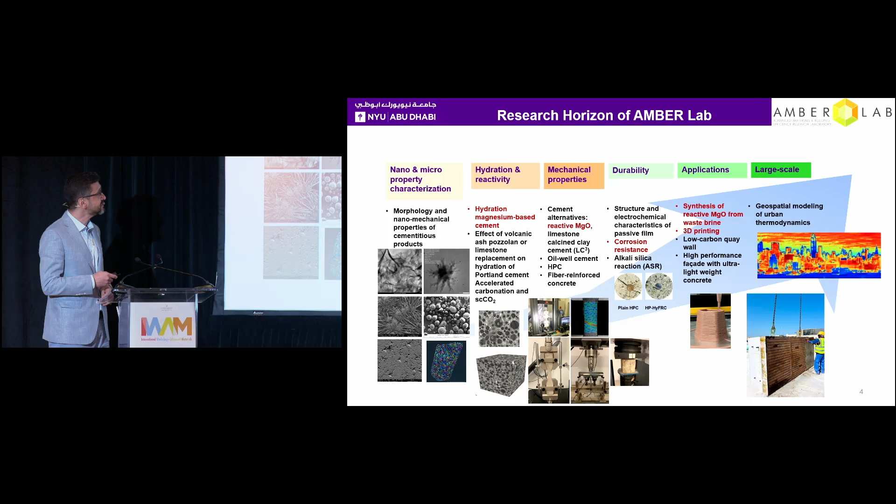Today, I'll be mostly talking about magnesium-based cement. It is an alternative to traditional Portland cement that absorbs CO2 during the strength gain mechanism. As we all know, by the middle of the 21st century the population will increase from 8 billion to 9.7 billion, and most of that population will be living in urban areas, particularly in coastal areas.

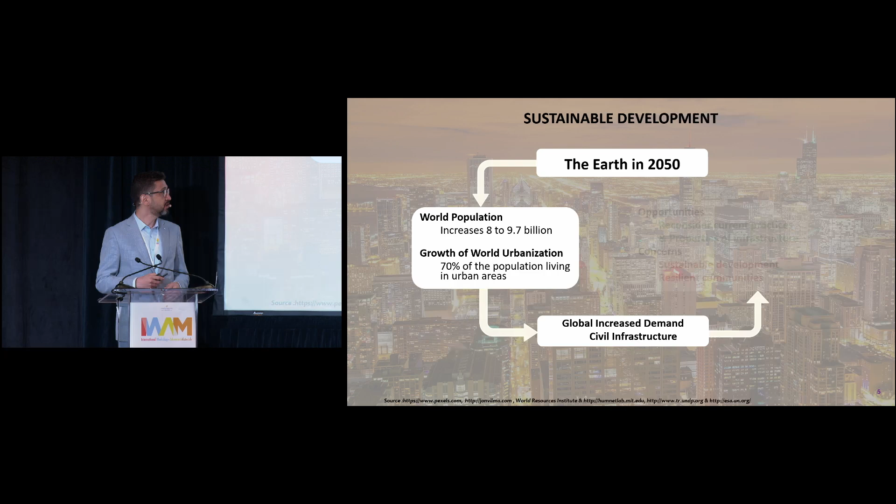Of course, it's good news as engineers, practitioners, developers, contractors, and architects - we are going to build lots of civil infrastructure. We can also translate this into an academic perspective: we will have a chance to educate the next generation of engineers and architects. From a research perspective, we will have a chance to do cutting-edge research to address sustainability and resiliency issues, reconsider our current practices as a whole community, and enhance the properties of our infrastructure.

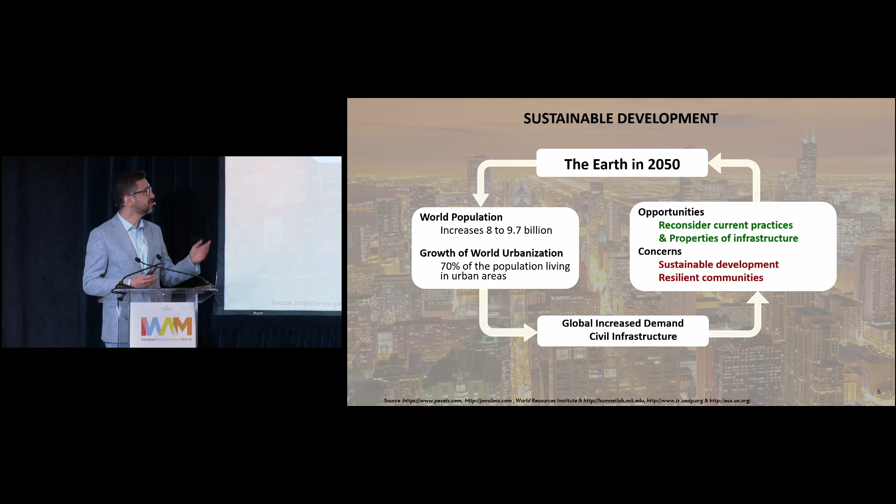It's also good to know that 40% of greenhouse gas emissions come from buildings. Both the UAE and United States have large room to improve in that area and increase energy efficiency to reduce global greenhouse gas emissions.

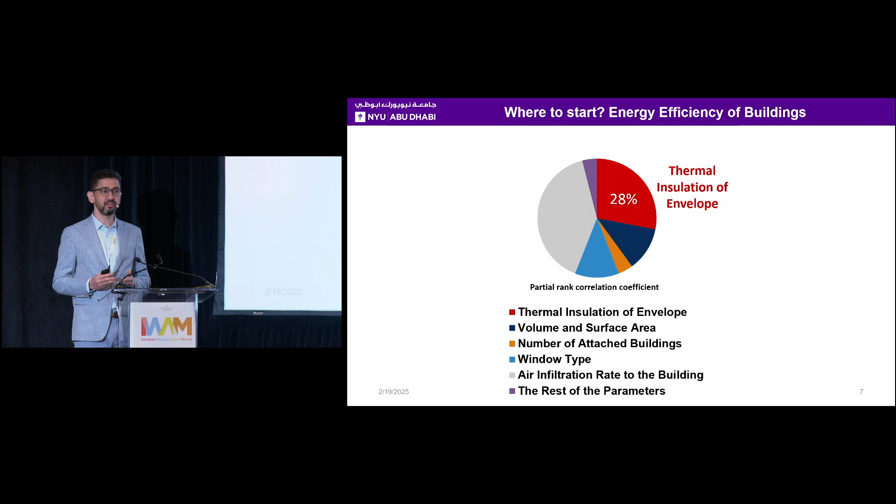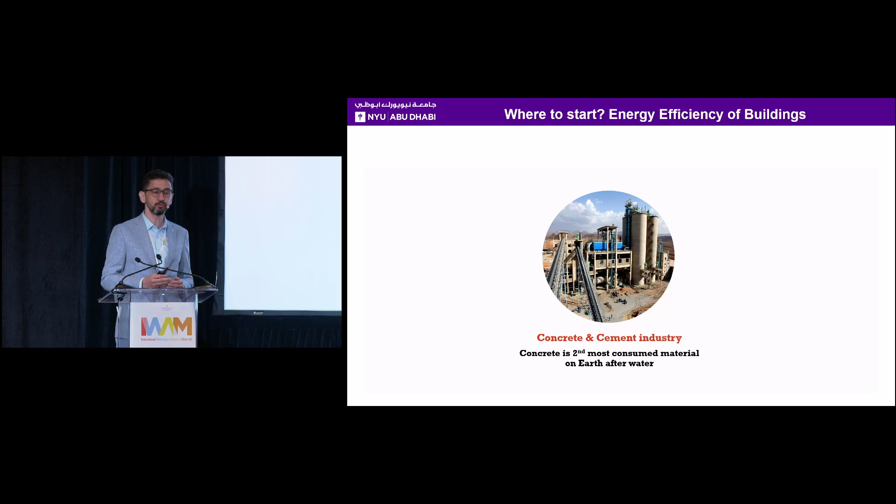Studies show that thermal insulation of buildings plays an important role in energy efficiency. To build our structures, we use different materials like steel, wood, ceramics, plastic, and of course concrete. Concrete is the most widely used human-made material after water, and it has a significant carbon footprint.

Projections show that demand for cement will increase significantly year over year, and our goal is to reduce the CO2 emissions associated with cement production.

On top of these challenges, arid regions like the Middle East and North Africa have water scarcity issues, and to narrow the gap between water supply and demand, desalination plants play an important role. Almost half of the world's desalination plants are located in the Middle East and North Africa regions.

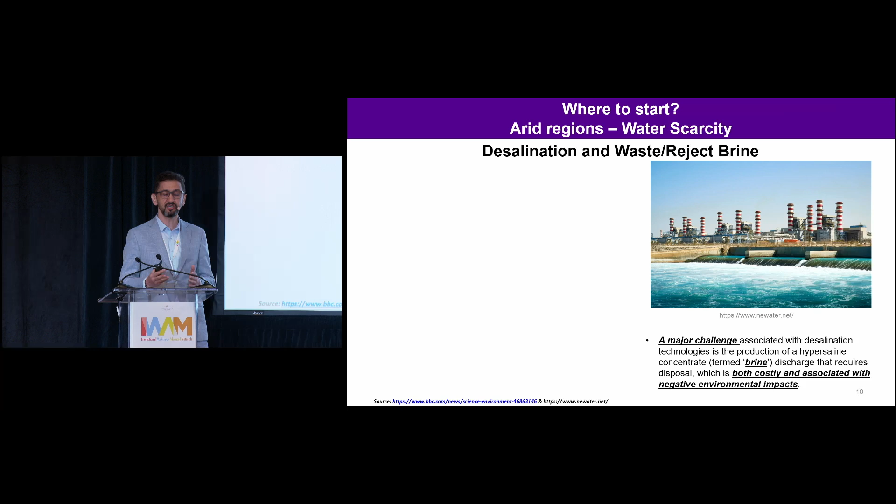Of course, desalination isn't without consequences. After water is desalinated, there is accumulated highly saline or hypersaline water, and the current practice is discharging this saline water back into the Gulf. The Gulf here is one of the hottest and saltiest bodies of water in the world, and discharging this salty water back is not an environmentally friendly approach - that's why we like to deal with these pressing issues.

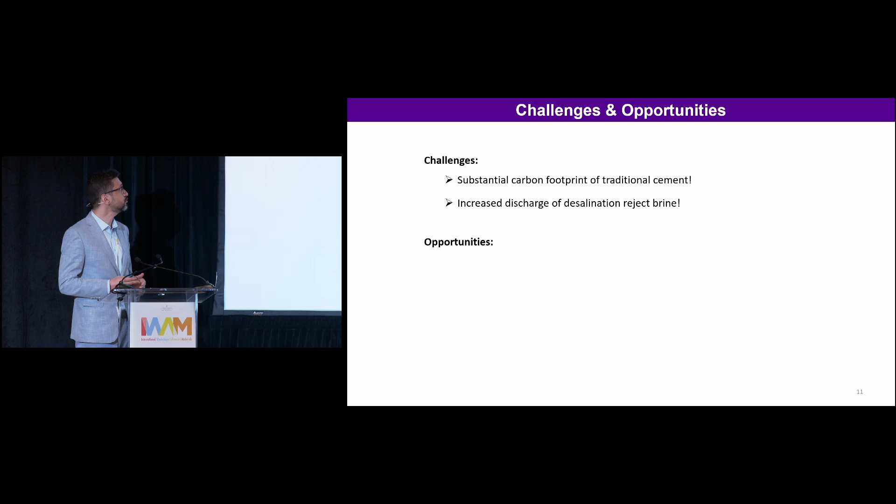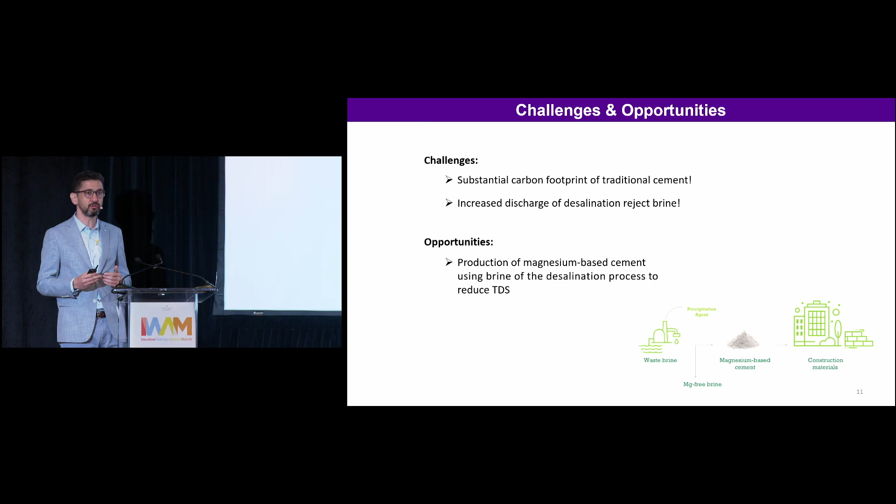The challenges we have are the substantial carbon footprint of the cement and construction industry, and increased discharge of desalination reject brine. The opportunity is using this brine to produce environmentally friendly cementitious material like magnesium-based cement. After processing, we can reduce the total dissolved solids in this hypersaline water and discharge it back to the sea safely.

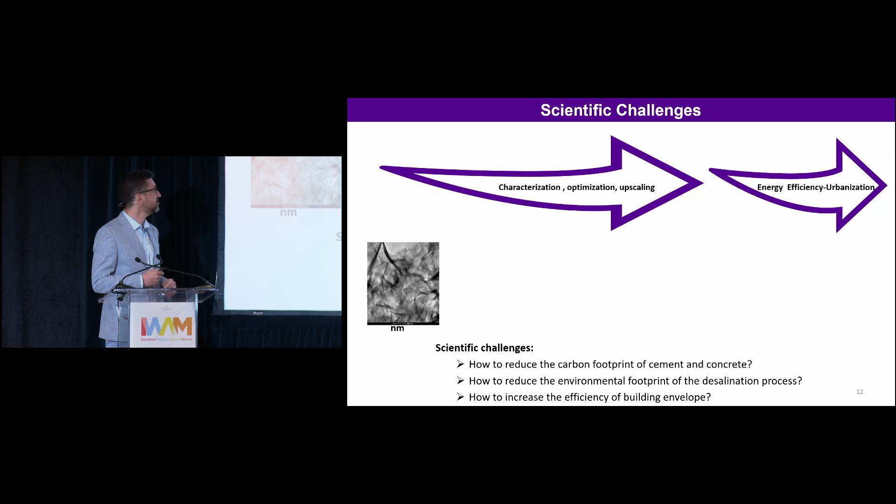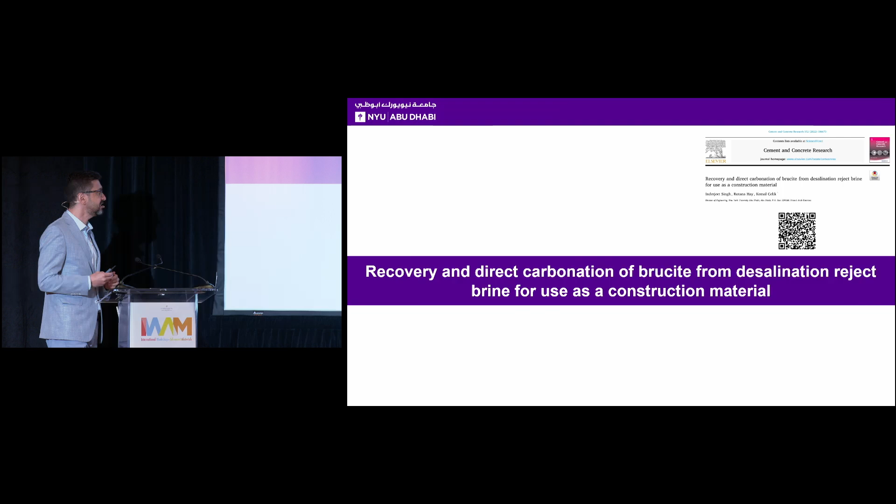Of course, it requires a multi-scale approach to address all these scientific challenges, starting from material characterization. Today I will be mostly talking about these four scales and give some snapshots of our projects. The first project I'd like to highlight is using reject brine from the desalination process and producing it as a construction material.

Magnesium-based cement is not new. It's produced from magnesium carbonate in a dry route, but at a relatively lower temperature for the calcination process, around 800 degrees Celsius, compared to 1400 degrees Celsius needed for calcination of Portland cement clinker. This decomposition of magnesium carbonate into magnesium oxide and CO2 is the one we don't want, because at the end we are producing and emitting CO2 into the atmosphere.

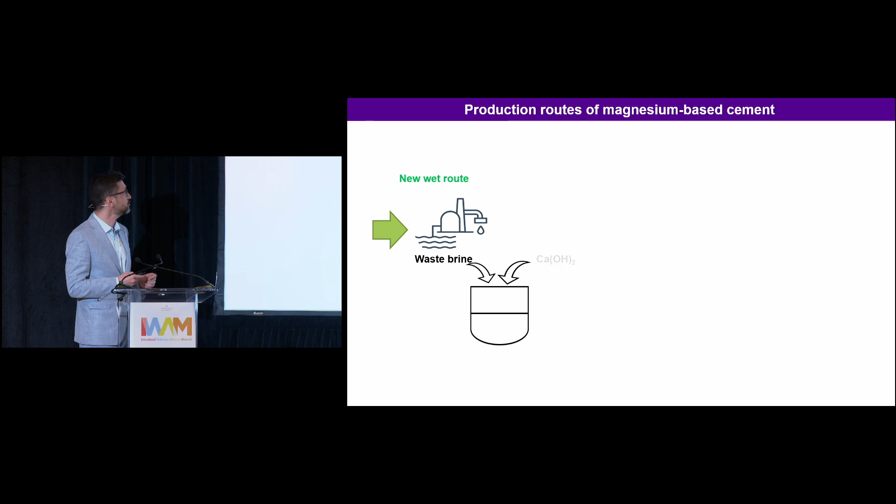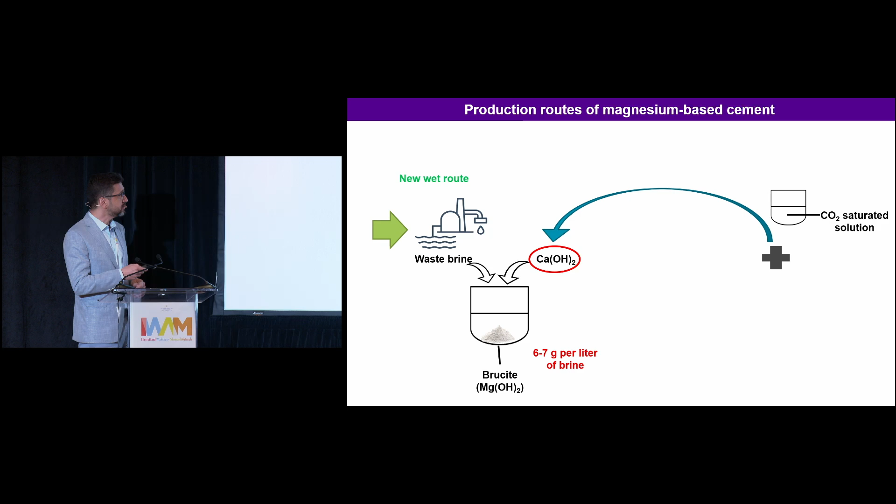So the new route that we are working on is using waste brine and a cost-efficient chemical agent to produce brucite, which is magnesium hydroxide. The source of alkaline that we are using can also be produced from this effluent of the reject brine or other sustainable sourcing, creating a closed loop and total recyclability.

I promise I don't want to show so many equations, but these are the important ones. Magnesium hydroxide is produced after desalination brine is treated, and then to gain strength, it needs to absorb CO2. The minerals produced after this carbonation process - nesquehonite, dypingite, hydromagnesite, and artinite - have different strengths and different surface areas.

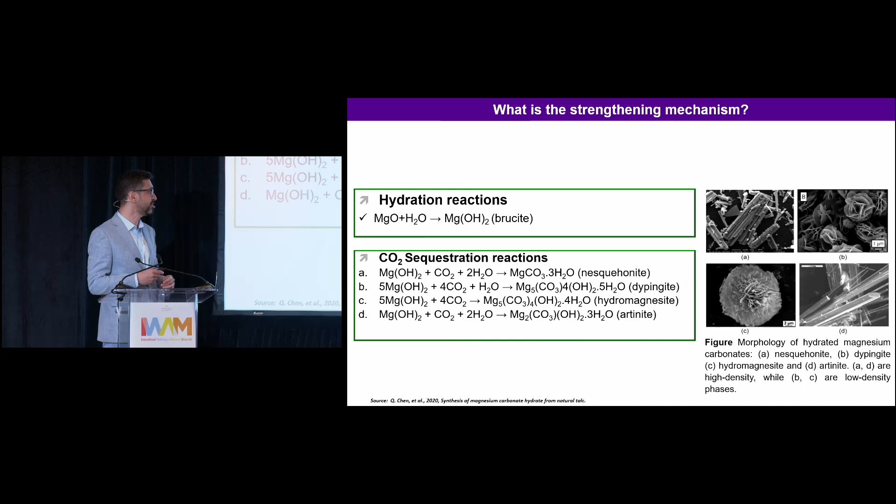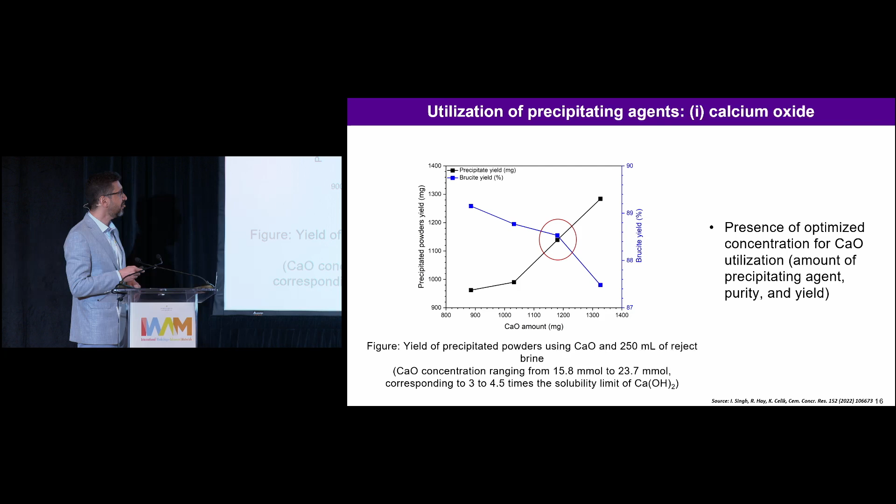Of course, to precipitate magnesium hydroxide requires some optimization process. We vary the calcium oxide amount and find the sweet spot with respect to precipitated powders versus brucite yield, and optimize our process. After this optimization, we did ICP-OES to measure the cations in the system, and the recovery is around 96% - 96% of the magnesium is recovered after this process.

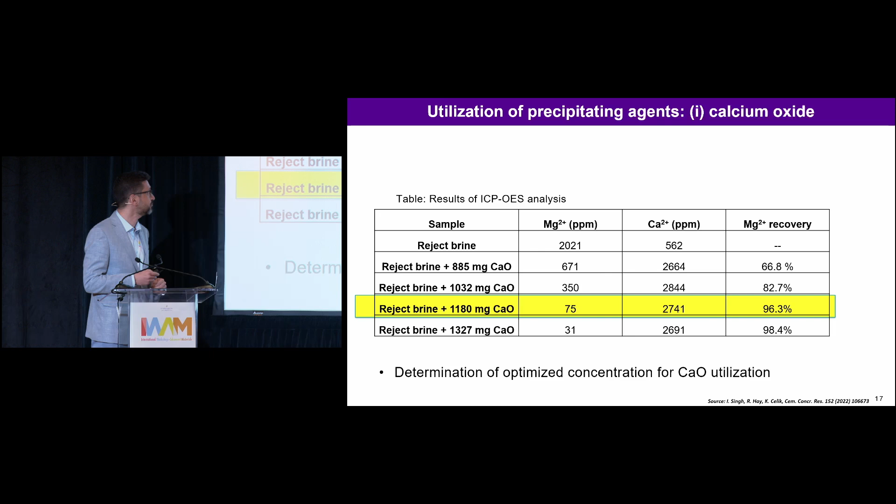We also utilized different alkalines like sodium hydroxide, ethanolamine, or ammonium hydroxide along with calcium oxide, though I didn't include those slides in my presentation. We also did a life cycle analysis, and most of the CO2 emissions or greenhouse gas emissions come from the production of this alkaline. Calcium oxide is the most environmentally friendly approach to process this reject brine.

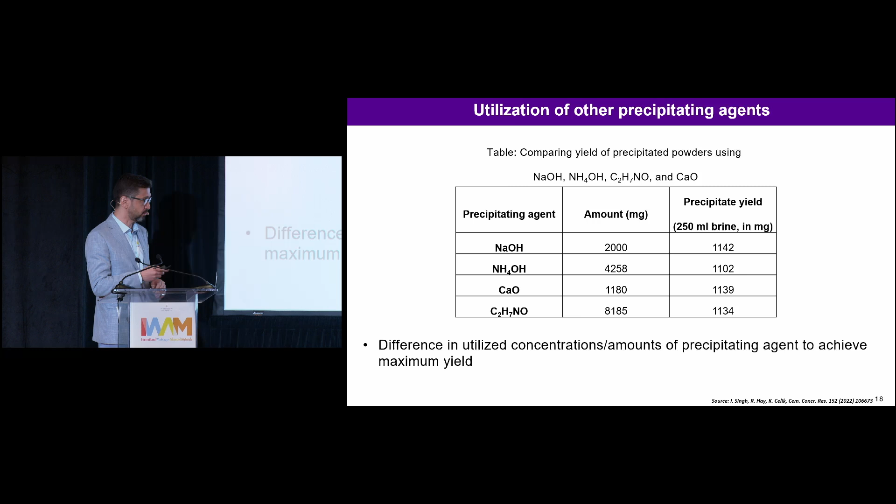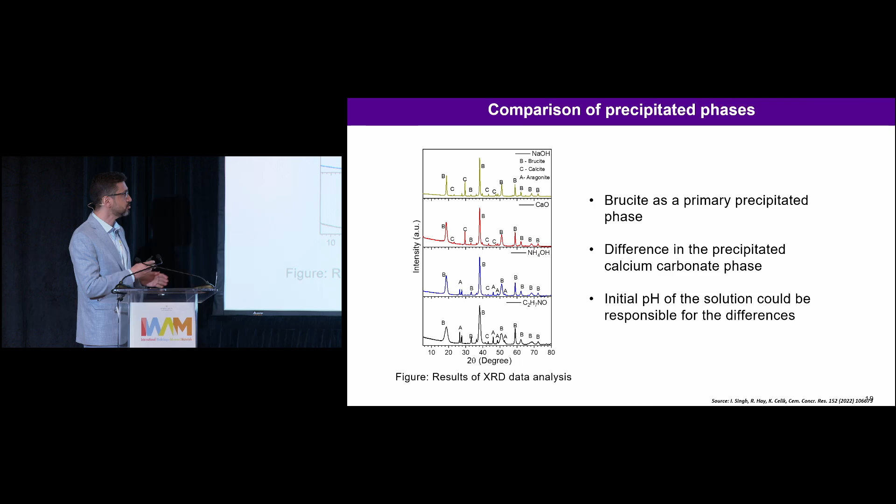The primary phase in this precipitated material with different alkalines, as mentioned, is brucite, with some trace amounts of calcite or aragonite. Most likely this is because of the initial pH of the solution used.

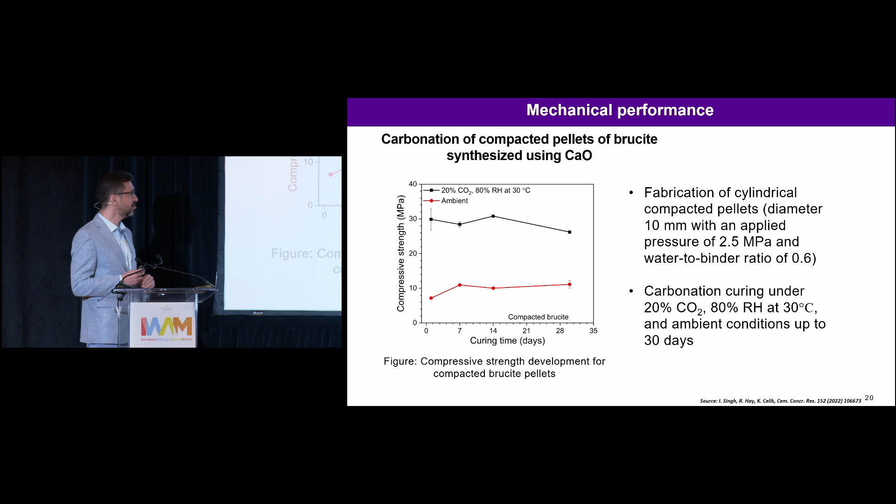Once we have this brucite, we need to cure it in an accelerated carbonation condition to increase the strength gain process. The sample cured in air reached around 10 megapascals, but once we accelerated the carbonation process with 20% CO2 and 80% relative humidity at 30 degrees Celsius, the strength development is significant - around threefold compared to ambient curing condition. 30 megapascals is sufficient for most structural or construction applications.

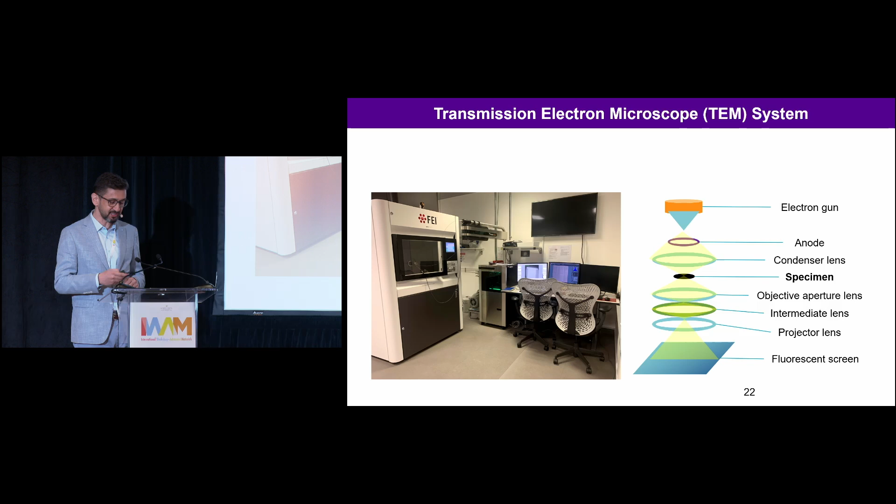In another project funded by NSF, we want to maneuver nucleation, growth, and phase transformation mechanisms with in situ visualization of the magnesium carbonate through nucleation mechanisms. This is an ongoing project, so these are preliminary slides I'm not going into too much detail on, but we use transmission electron microscopy, similar to light microscopy, but instead we use an electron gun, allowing us to look into the morphology, diffraction pattern, and chemistry via EDS maps.

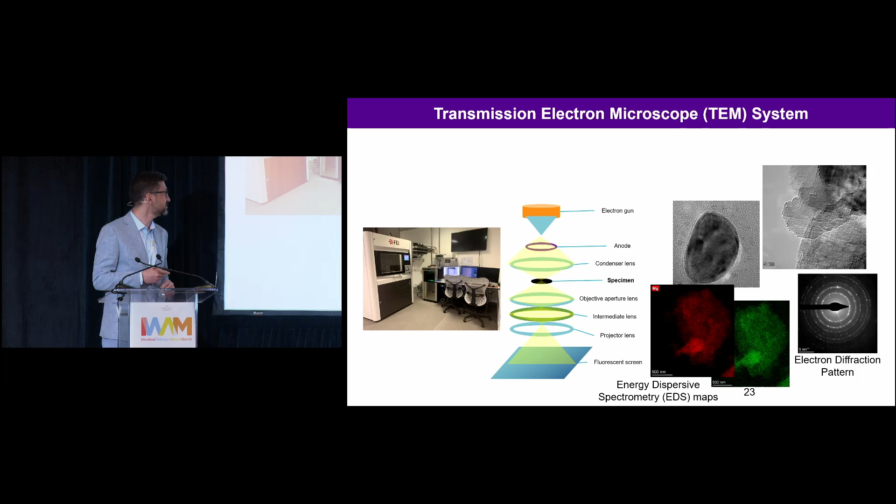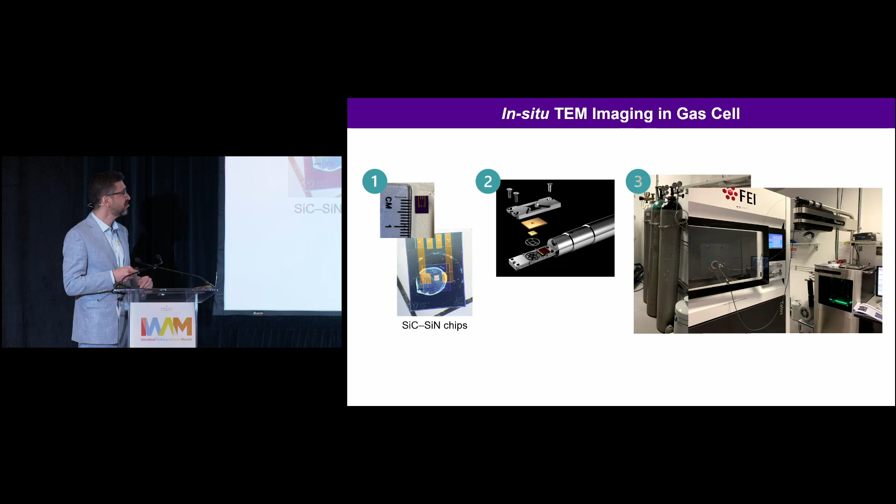The special instrument we use is an in situ carbonation chamber within this instrument. In this chamber, we are able to vary the pressure, flow rate, temperature, and gas mixtures, using a tiny sample holder assembled into the TEM machine. Using silicon carbide and silicon nitride chips, we add our samples and assemble them into the TEM to look into carbonation and hydration mechanisms in real time.

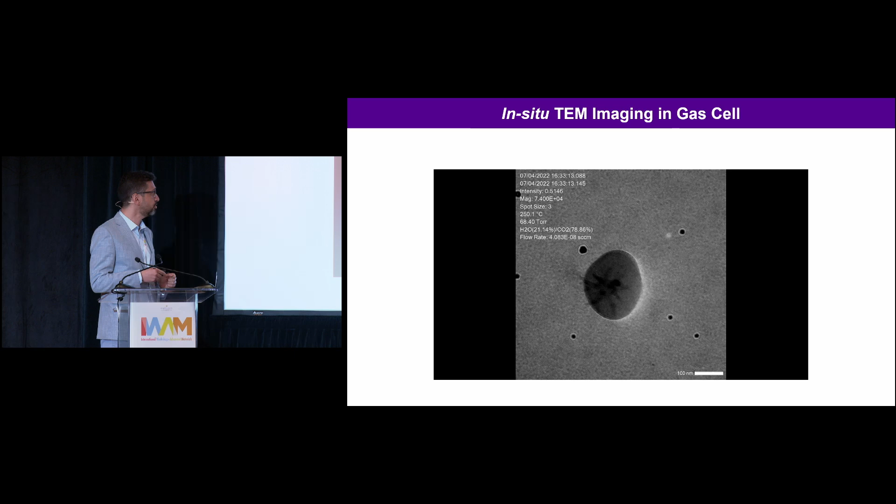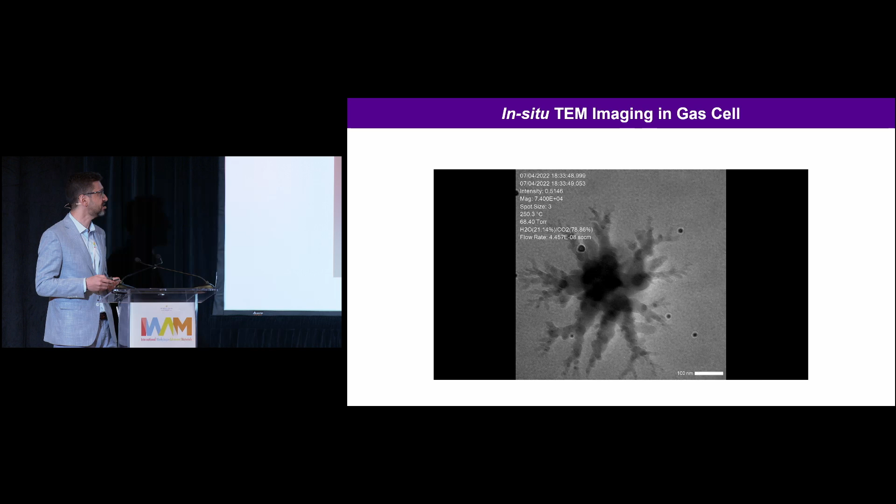So after around 20 minutes, we are able to see some round shape forming, and then after around 1 hour, there's an edge breaking out and the start of nucleation, followed by growth on these edges. After around 2 hours, we see small, nano-size particles forming in the microstructure. We suspect this is amorphous magnesium carbonate because there is no clear pattern in the diffraction pattern.

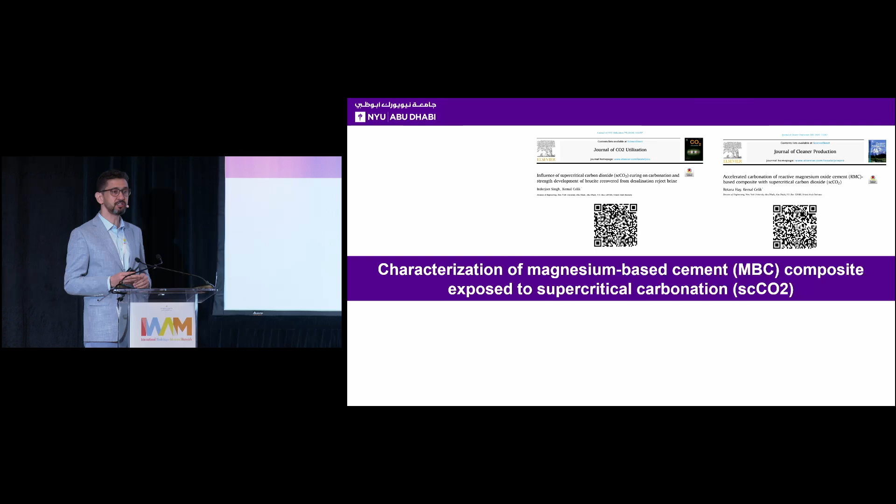Another project I want to highlight is using supercritical CO2 to accelerate the carbonation process. As you're likely familiar, supercritical CO2 has low viscosity and can penetrate deeper into the materials. What we need is to increase the temperature to around 31 degrees Celsius and the pressure to around 7.5 megapascal, then observe the phase transformation and CO2 sequestration capability in the matrix.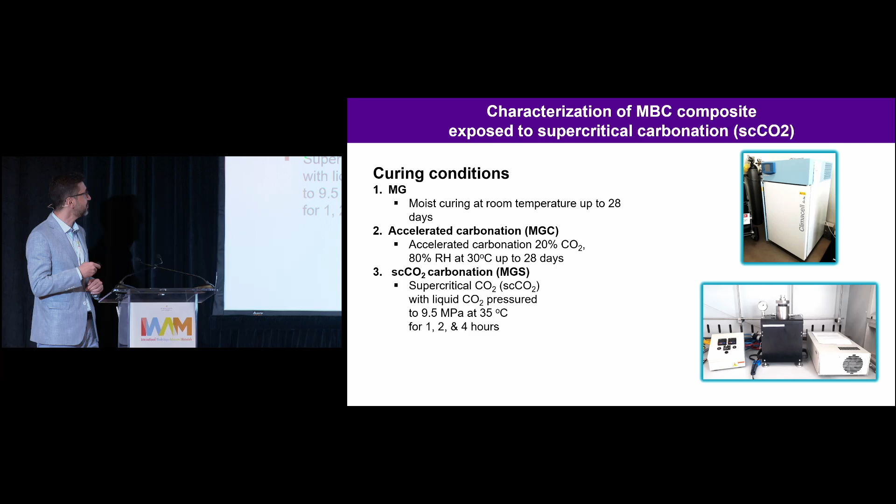We have 3 samples: one magnesium cement cured in air, another in an accelerated carbonation chamber, and the third using supercritical CO2. We compare the results through a comprehensive testing program. The most important one, Raman spectroscopy, shows the main phase is brucite, but we also see peaks for nesquehonite and hydromagnesite. At 28 days of curing in the accelerated carbonation condition, we see hydromagnesite, but with supercritical CO2, the hydromagnesite peak disappears and we mostly have the nesquehonite phase.

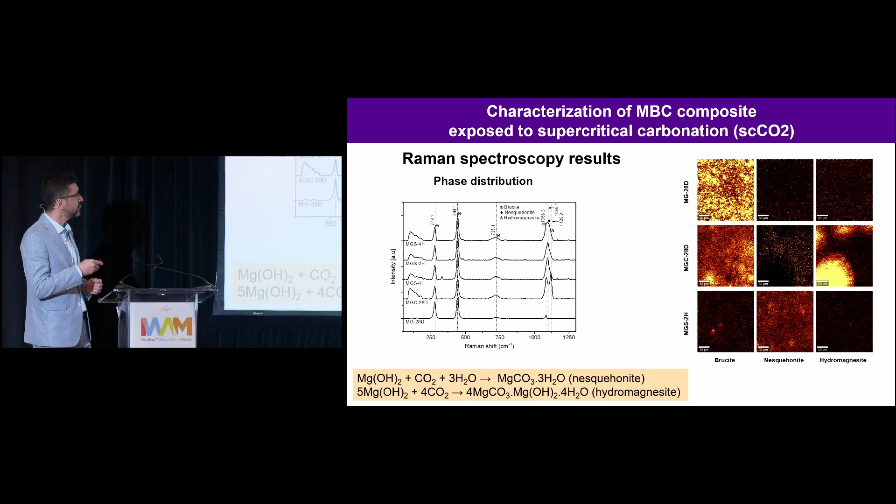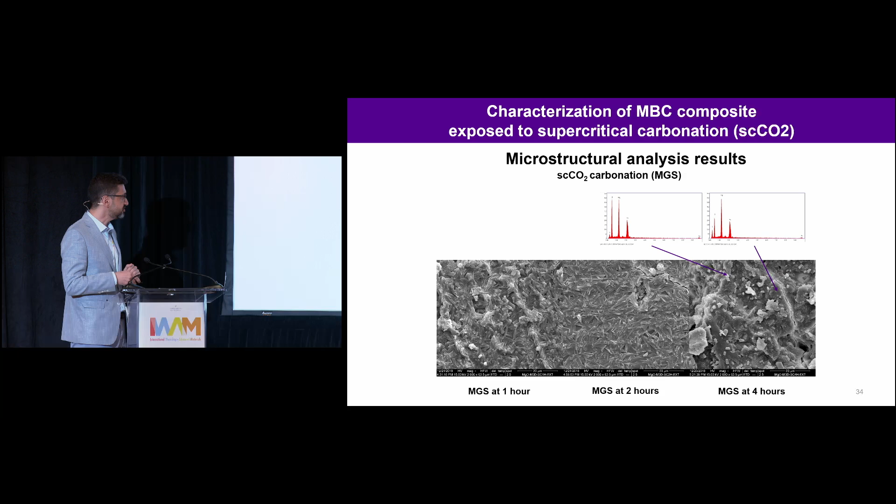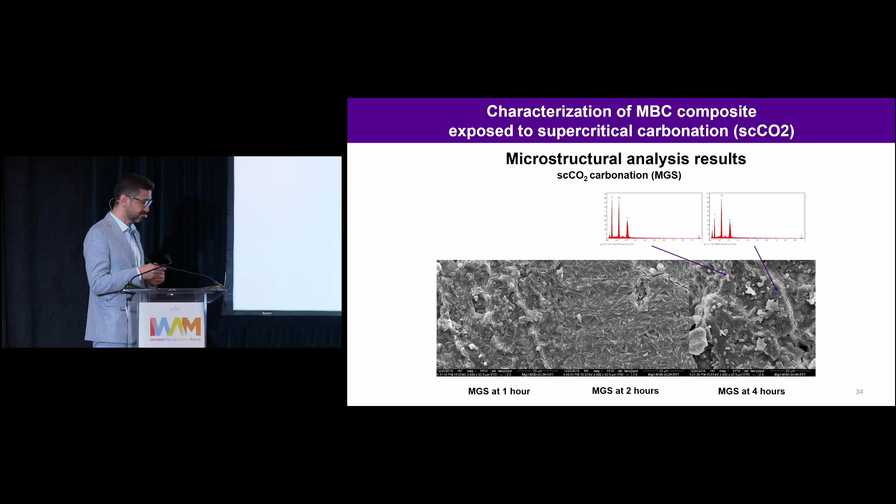So as an engineer, we have to look at how strong these materials are. After curing, as I mentioned previously, we have significant strength gain in the magnesium-based cement, but we need to wait around 3 to 7 days to gain this strength.

For the precast concrete industry, we need to accelerate the production cycle to within an hour, for example. In this case, the supercritical condition is much more useful. In 4 hours, for example, we reach around 40 megapascal, slightly above the strength of the accelerated carbonation condition, and the carbon sequestration factor is around 31 to 34%.

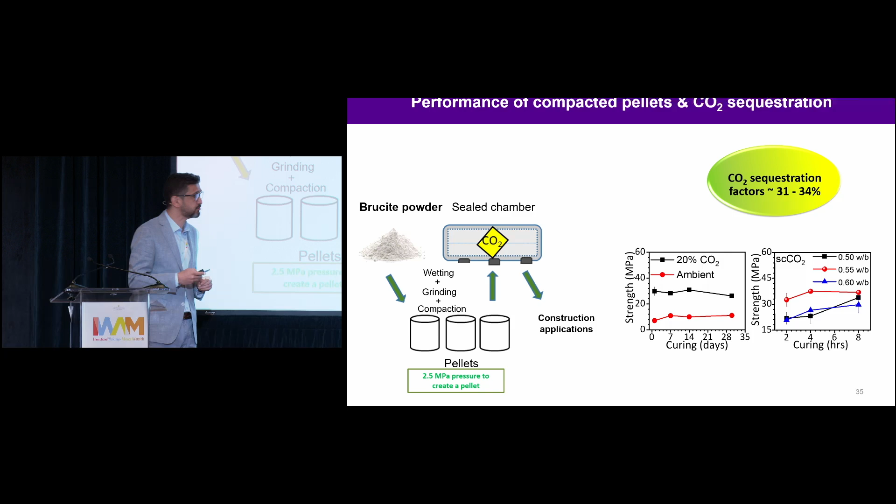Here we see another version of this mechanical strength development with respect to water-to-binder ratio. At 14 days, the sample cured in the environmental chamber reaches around 30 megapascal, while the one cured in the supercritical reactor reaches much higher strength.

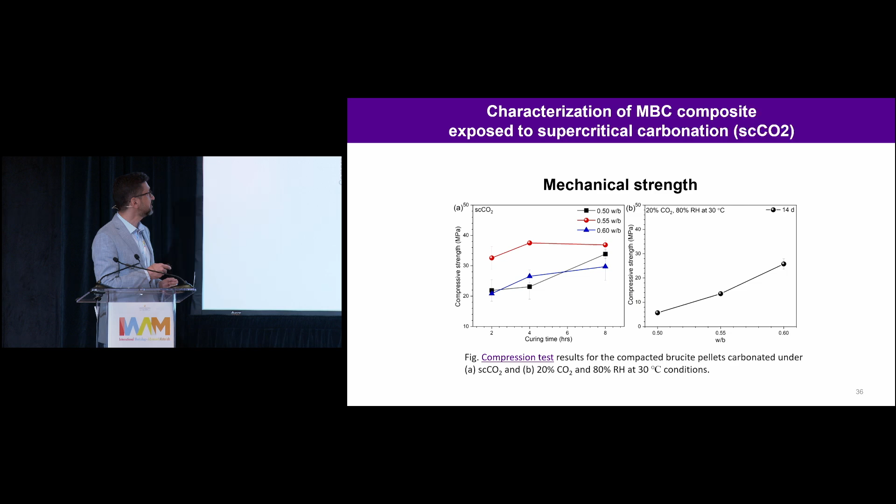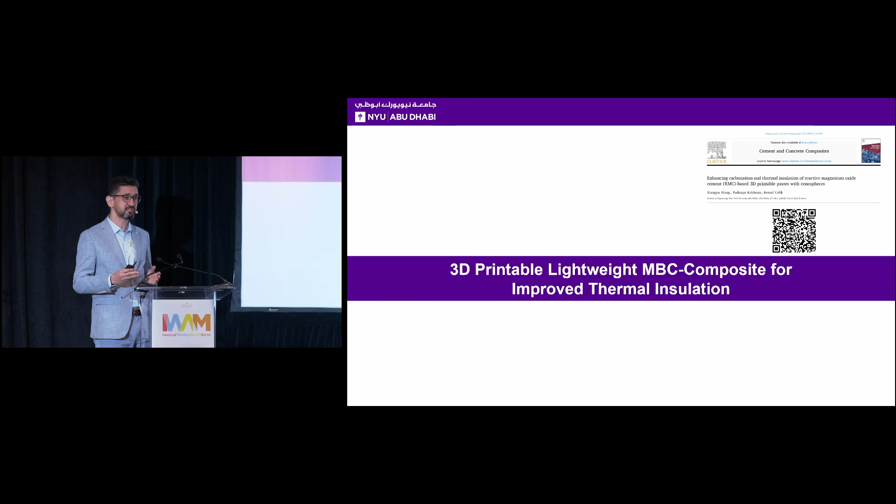In this region, 3D printing is also another hot topic, and we'd like to see how this material is 3D printable, and how adding cenosphere, a byproduct of coal combustion power plants, will be useful to improve the thermal insulation of the structure and produce a lightweight composite.

So we look at 3D printability of this magnesium-based cement, adding 20% cenosphere and some PCE-based chemical admixtures. We are able to 3D print this material with intriguing shapes, and we also compare the printed versus cast sample, curing in the accelerated carbonation condition.

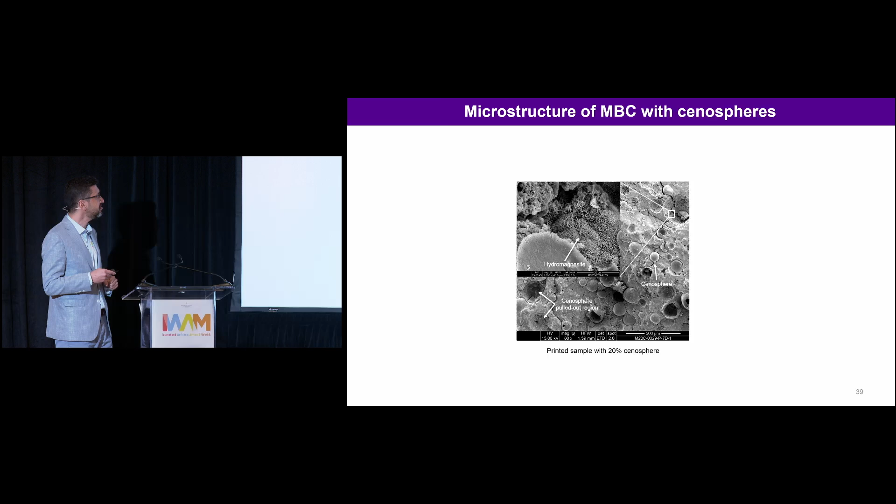As I mentioned, cenosphere is a byproduct of the coal combustion power plant. These are hollow, inert materials, and here we see some of them, with some pulled out after testing. We are also able to see hydromagnesite minerals in the microstructure.

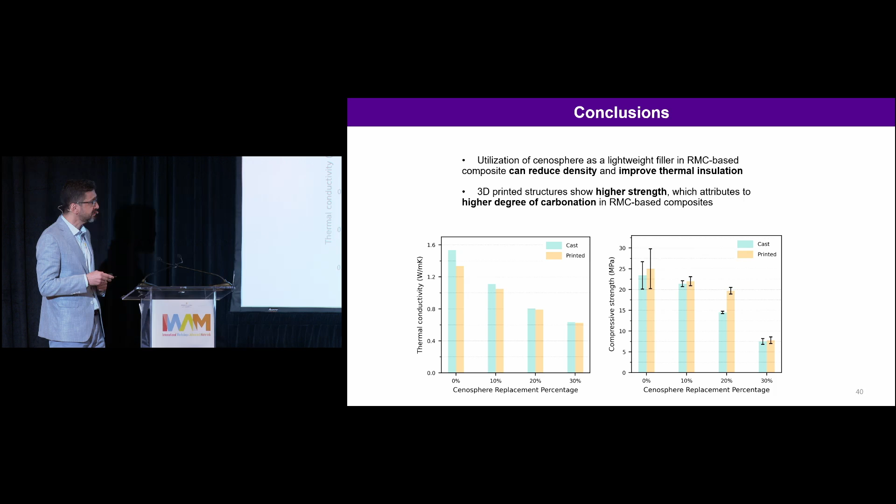We also look at the thermal conductivity. As expected, thermal conductivity decreases by increasing the cenosphere, this porous material, and we compare the result with cast and printed versions. Since 3D printing also increases the porosity in the structure, the 3D printed structure has lower thermal conductivity. In terms of strength development, the 3D printed structure has larger strength. If you look at this 20% cenosphere replacement, it is because of the carbonation process.

3D printing provides larger surface area and more porous structure, which increases carbonation during this process. We can safely say that 3D printing and carbonation will be a good option in magnesium-based cement.

In a continuation of this NSF project, we'd like to see if we can reinforce this engineered magnesium-based cement with synthetic fibers.

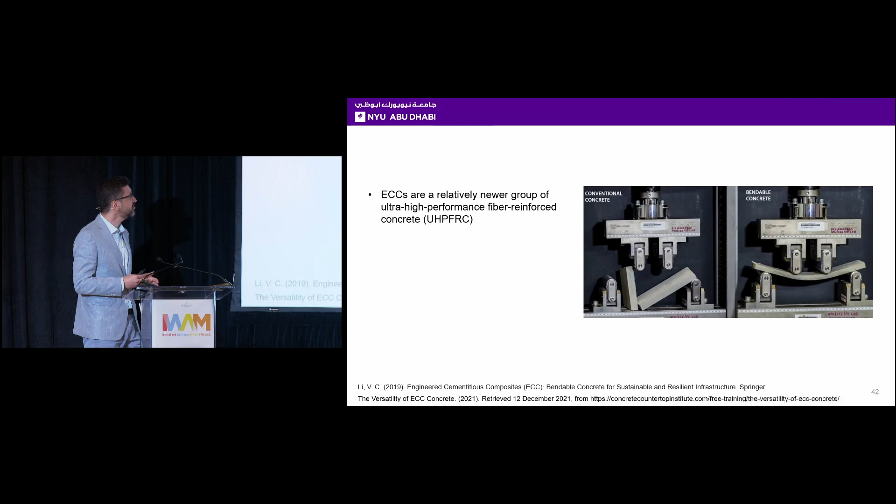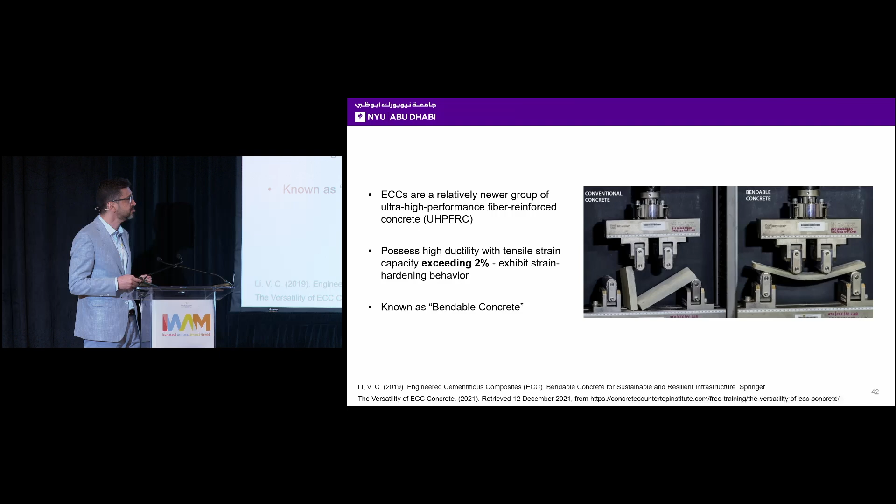ECC, or engineered cementitious composites, are a relatively newer group of ultra high performance concrete. As you know, concrete is a brittle material in tension and flexural loading - it can break easily. But ECC is also called bendable concrete. Through fibers, we can increase the strain capacity.

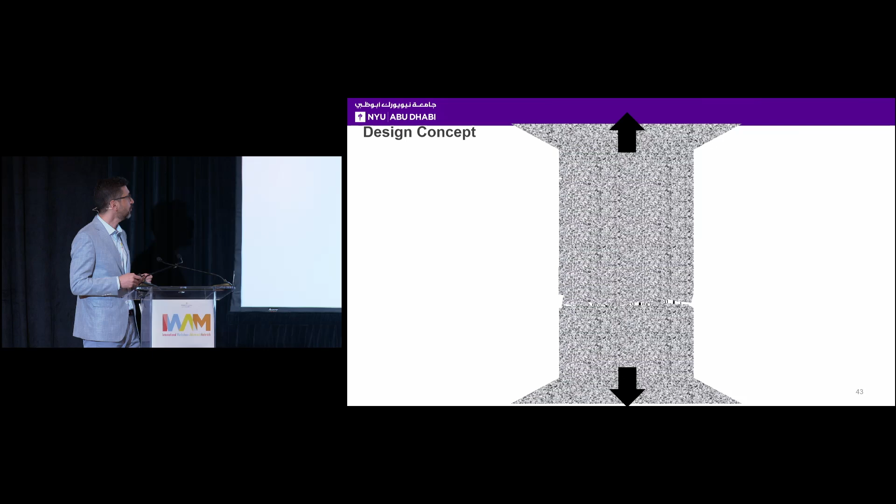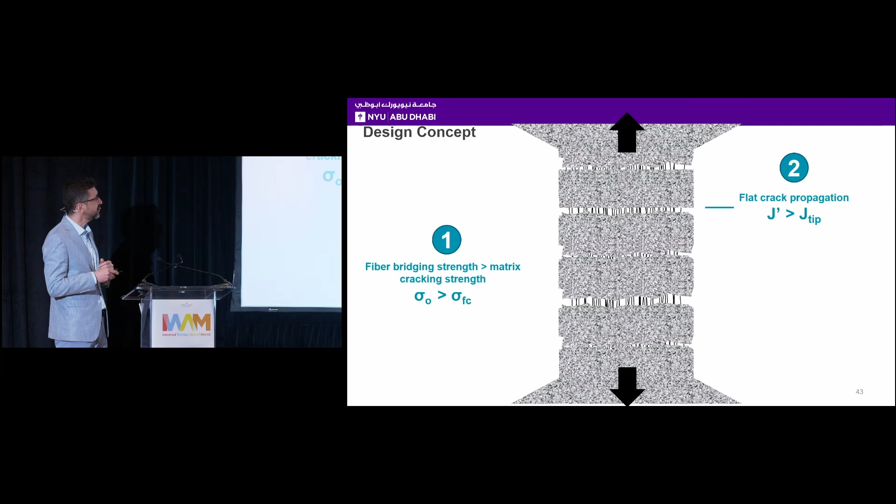The goal is to increase the strength of this bridging matrix and get higher fiber bridging strength than the matrix strength by itself, then dissipate or absorb this energy through laminar or flat cracks. Energy dissipation needs to appear in order to have this bendable concrete.

There is a tedious micromechanical modeling process that I'm not going to get into too much detail on, but our goal is to increase the energy dissipation through fiber addition, and then increase the bendability or strain capacity of the concrete.

The parameters that we can tailor are the fibers themselves, the fiber matrix interface, and the matrix. There are different parameters within these three main categories. We can test this fiber matrix interface with a single fiber in our facility, and also get the bulk material properties through flexural test and tension test.

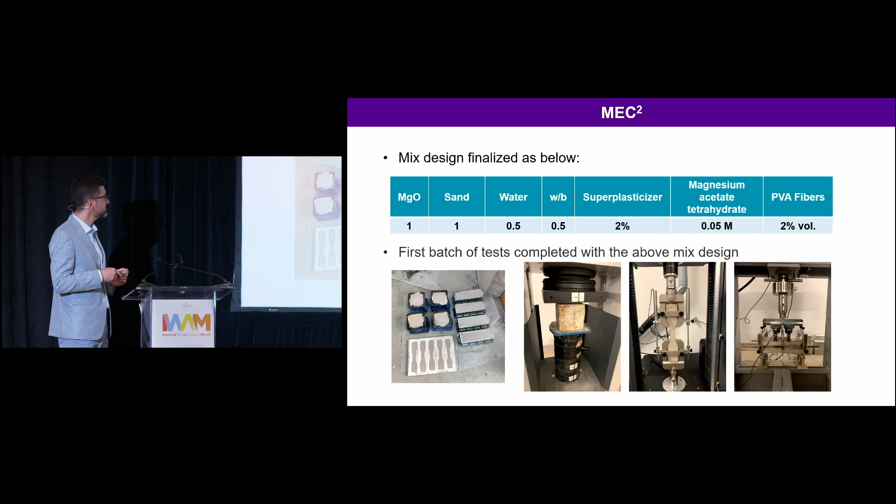By tailoring this mix design, we are able to produce some MEC², or magnesium-based engineered cementitious composite, and produce some cube samples, prisms, and dog bone samples. We test them in tension tests and do some digital image correlation to see how these materials behave under loading.

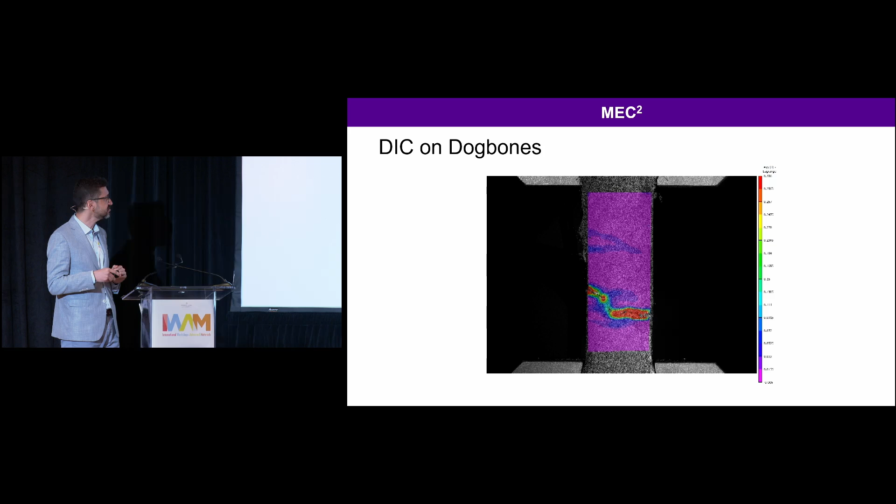Again, this is an ongoing work, I'm just giving you a heads up. We are able to see energy dissipation through cracks, but our goal is to increase these cracks throughout the matrix. This is the test we have done for the 4-point bending test.

Once it is loaded, we can see the cracks, as well as stress and strain development. What we'd like to see is the red color changes distributed towards the bulk faces.

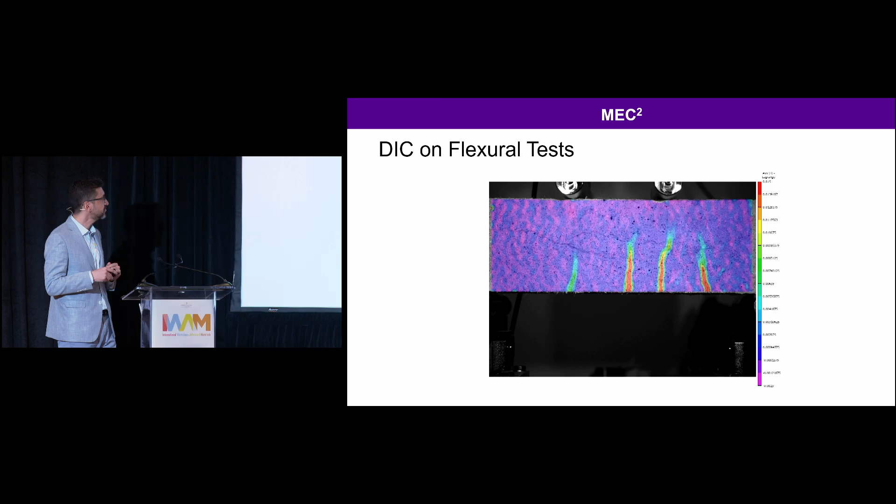To wrap up my talk, I'd like to show you a short video that brings what we have discussed to life.

We are attending a competition, a UAE-based competition. Actually, it's an international competition, but organized by the Environmental Agency of Abu Dhabi. Currently we are in the last phase of this competition. We have been dealing with 4,000 liters of brine per day at this stage. But this video was prepared for the previous stage, just showing 300 liters of brine. I hope it will work.

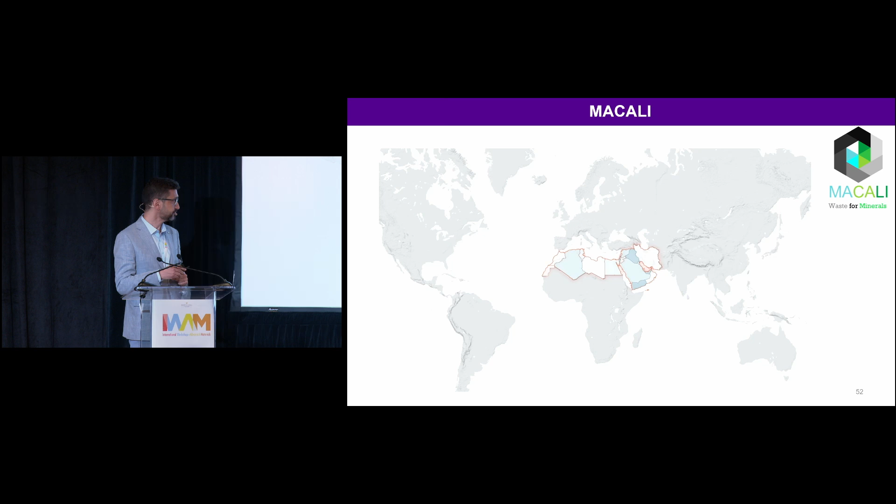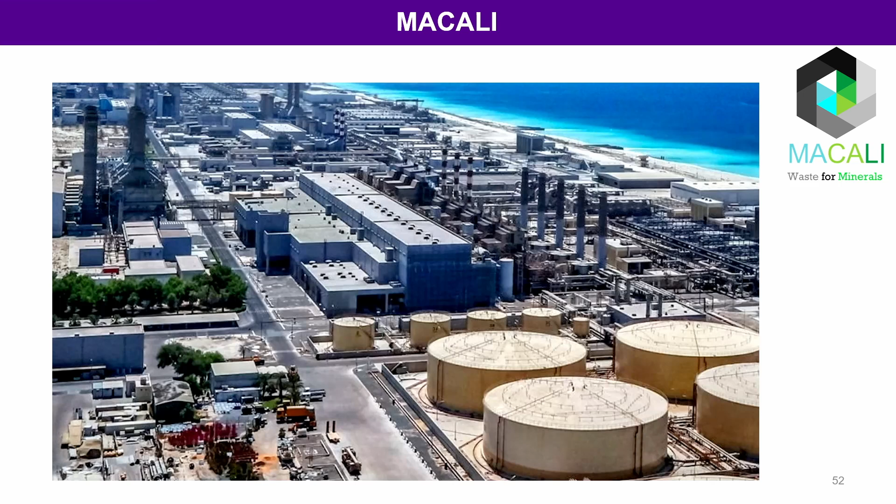The Middle East and North Africa region accounts for 70.3% of global brine produced from the desalination process. Direct disposal of this brine to the sea has adverse effects on marine life. Meanwhile, several industries, including the construction industry, are evolving to employ low carbon footprint materials and contribute to net zero carbon dioxide goals. With these motivations, Amber Lab at NYU Abu Dhabi came up with MACALI, a 3-stage process to recover magnesium hydroxide, calcium oxalate, and lithium carbonate from reject brine for construction and energy applications.

This technology combines 3 stages involving chemical precipitation for the recovery of these minerals.

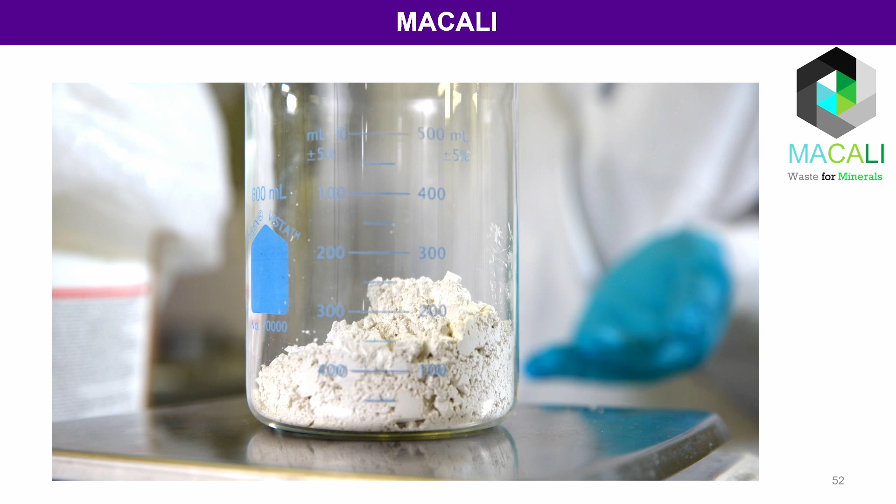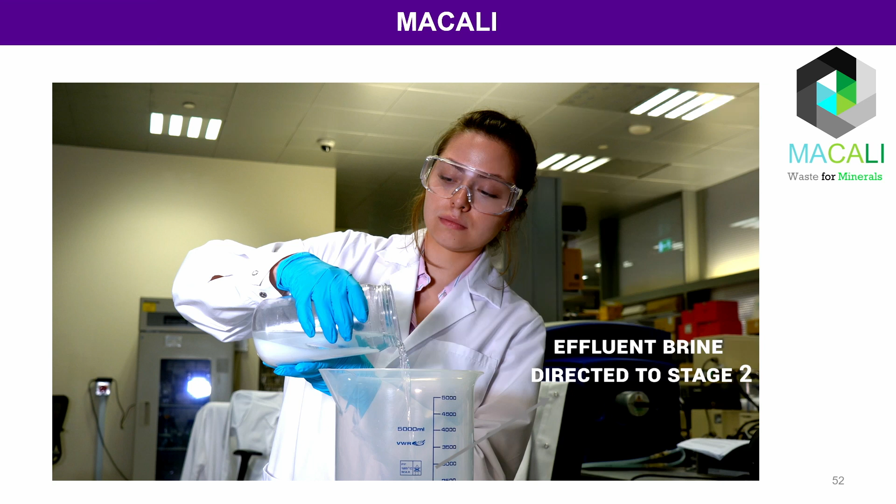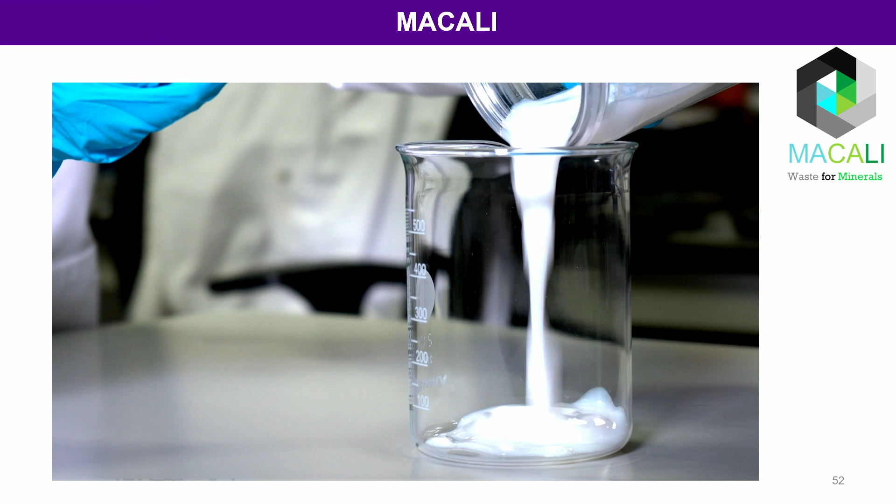In stage 1, we employ a simple precipitation process to synthesize brucite from reject brine. In the synthetic procedure, calcium oxide, a cost-efficient precipitation agent, is mixed with deionized water, which is then added to 15 liters of brine. The solution is stirred for 1 hour. The milky solution is then centrifuged to separate the powders and calcium-rich brine, directed to stage 2. Depending on the purity required for brucite, the wet powders can be washed in one or several centrifugation cycles using deionized water to achieve up to 94% purity. The wet powders are then transferred to heat in an oven at 100 degrees Celsius to obtain anhydrous brucite.

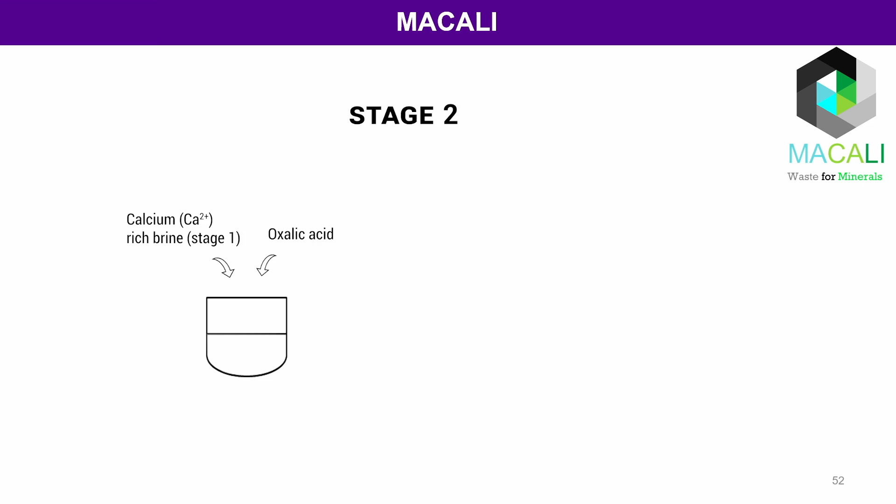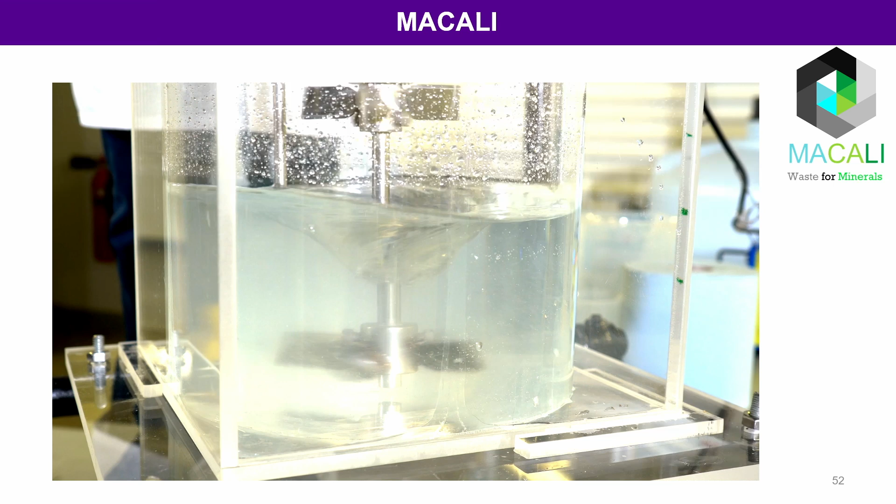In stage 2, a similar precipitation process can also be utilized to recover calcium ions in the form of calcium oxalate, a valuable mineral, using oxalic acid as a cost-efficient precipitation agent. This process is similar to stage 1, where oxalic acid could be added directly to calcium-rich brine from stage 1 to synthesize calcium oxalate powders within 1 hour of reaction time.

In stage 3, lithium carbonate could be recovered by a combination of evaporation and precipitation procedures from the effluent brine of stage 2.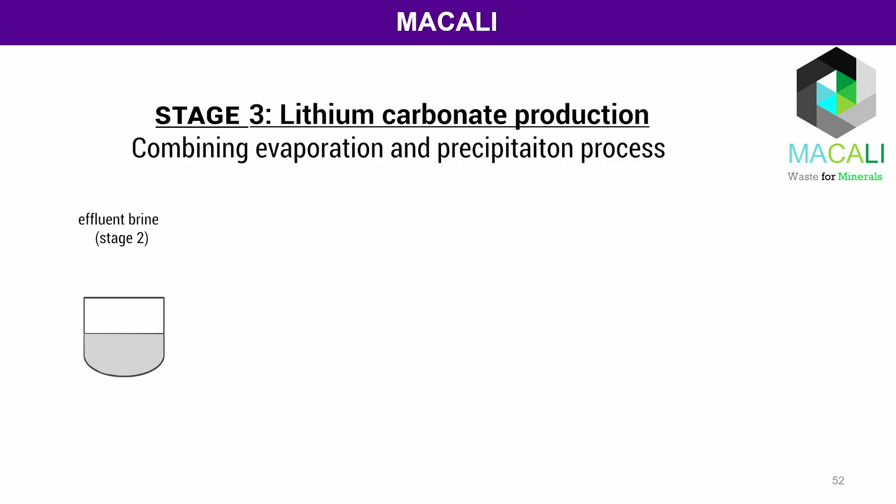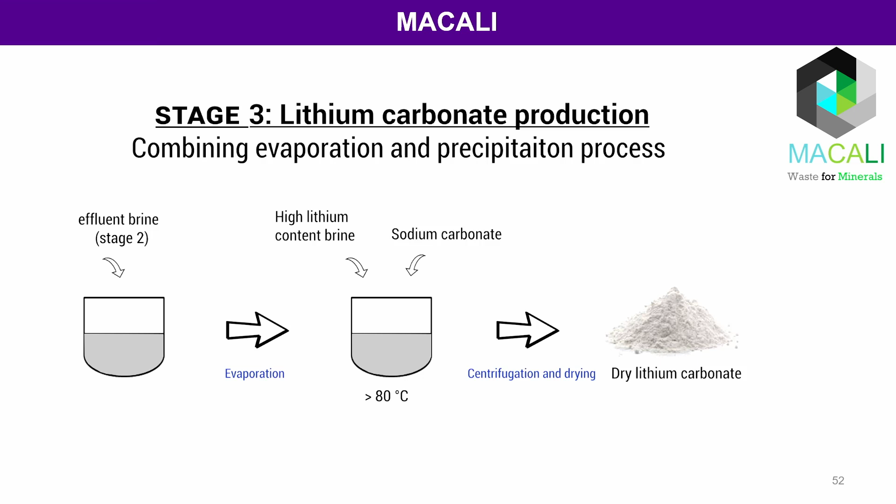The evaporation process is required to increase the lithium content in the brine. Sodium carbonate could then be used to precipitate lithium carbonate from the high lithium content brine at reaction temperatures above 80 degrees Celsius. Our prototype successfully demonstrates the technology for producing brucite and calcium oxalate.

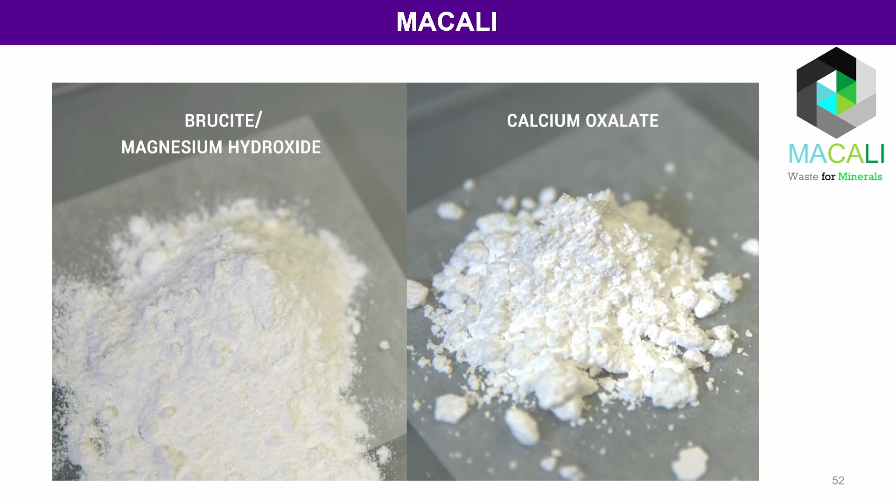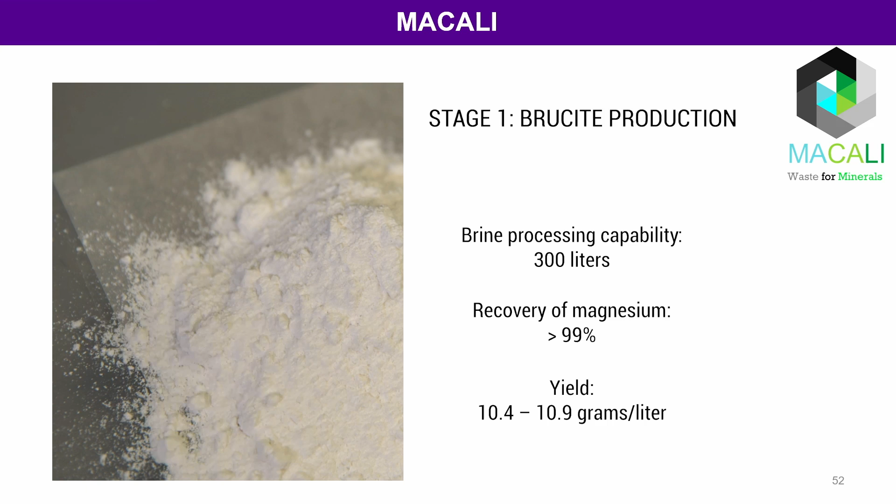The precipitation stages are capable of processing 300 liters of brine per day and recovering up to 99% of magnesium in the form of brucite, with a yield of 10.4 to 10.9 grams per liter. Calcium oxalate can be synthesized with a yield of 11.8 grams per liter.

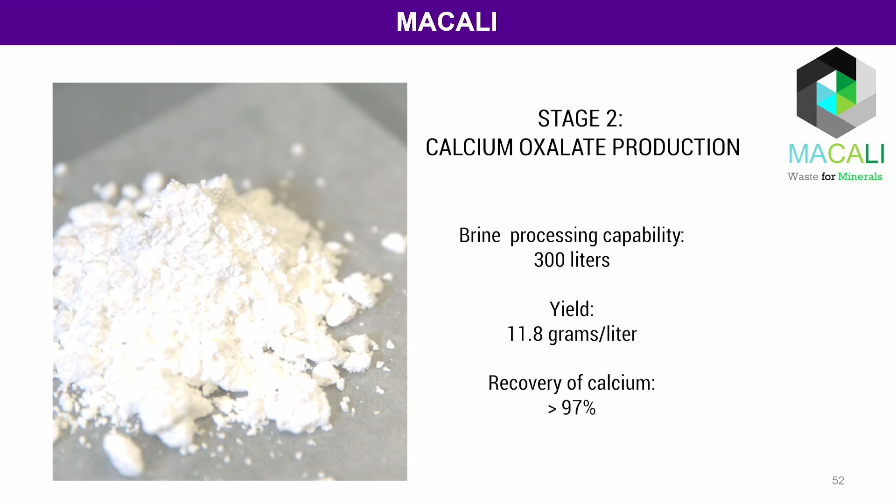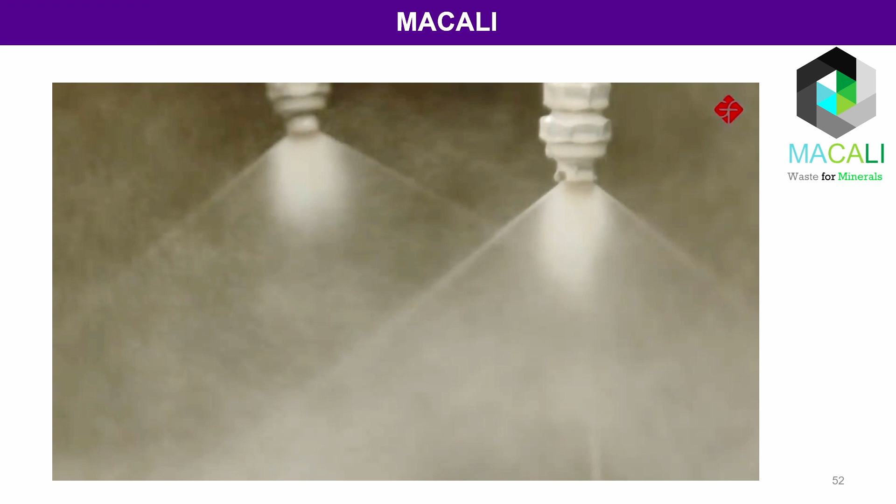There is a huge potential for these recovered materials, while magnesium-based cement is a sustainable alternative to ordinary Portland cement. Calcium oxalate could be used for potential applications in the ceramic industry to produce ceramic glaze. Lithium carbonate is also an important industrial chemical as a precursor to the compounds used in lithium-ion batteries.

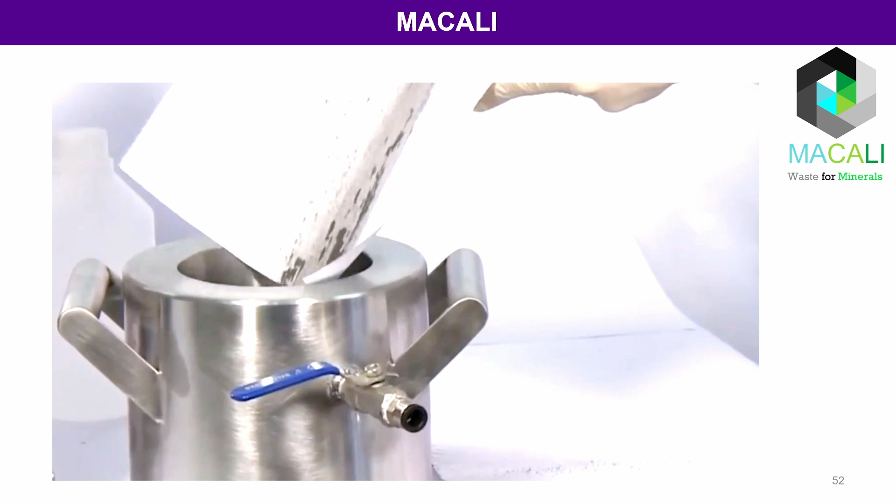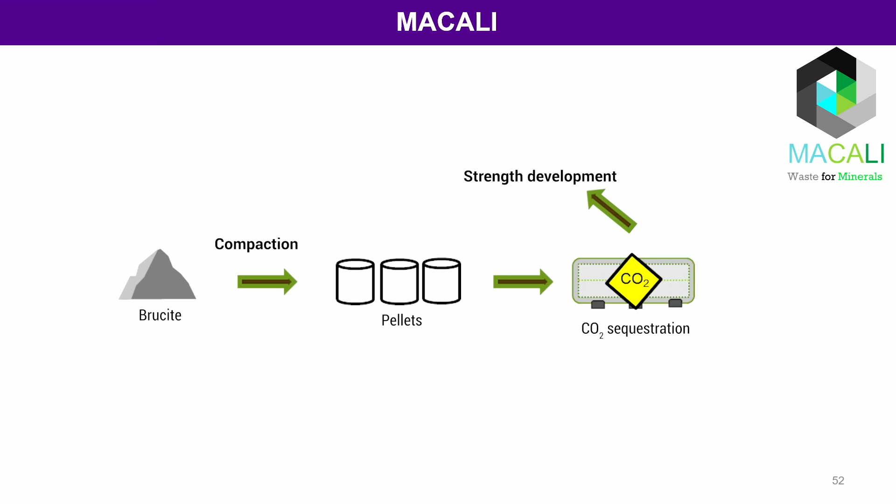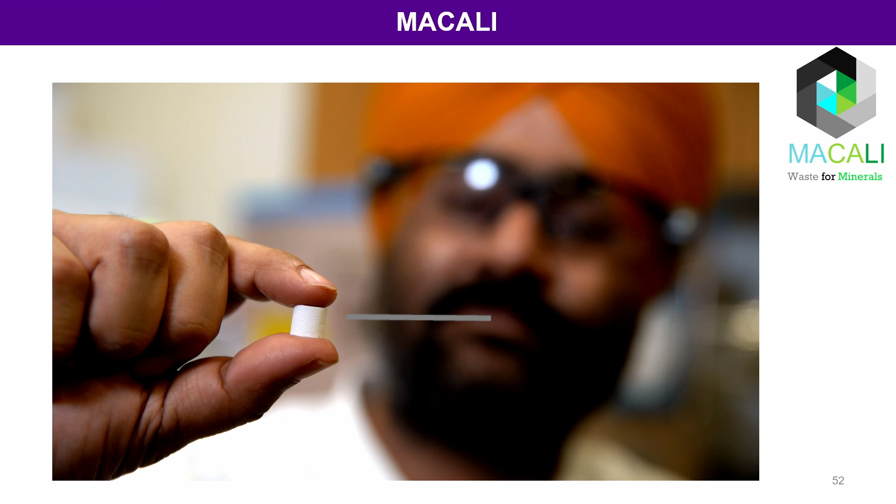Our brucite production process reports around 0.78 kilograms of carbon dioxide emissions per kilogram of brucite. What is unique about the precipitated brucite is that it sequesters carbon dioxide for strength gain. Its carbon dioxide absorption capacity can reach up to 35% of brucite weight. Compacted pellets of the brucite could be carbonated to achieve strength in the range of 26 to 30 megapascal for construction applications.

MACALI aims to expand the technology to the sea with its endless supply of resources. At Amber Lab NYU Abu Dhabi, we envision a world where future generations live in harmony with the environment.